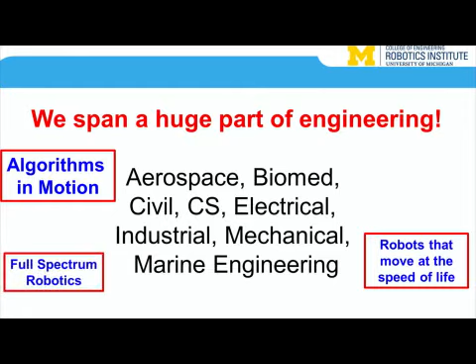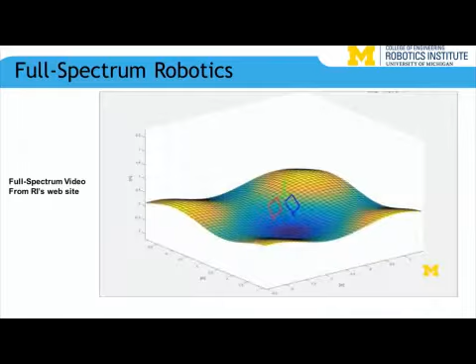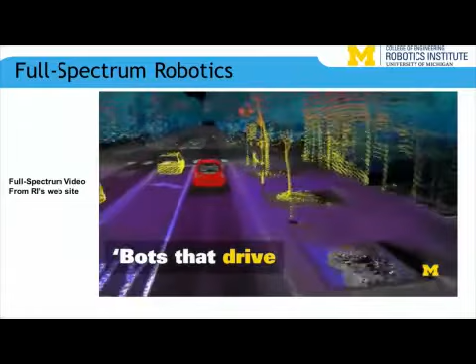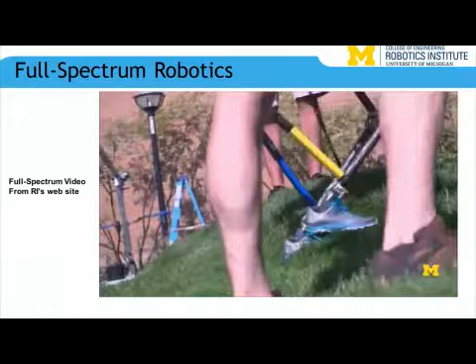So this is a video that covers some of the activities, whether it's on land or underwater or in the air, or building hardware to be super efficient, algorithms to make machines autonomous and work around people. Yes, we do work with M-City. We have great activities for students learning. Impossible robots doing absolutely wondrous things. And we'll talk about our work in rehab robotics as well. Now, the only thing we're missing is a couple of students like this last guy from the Discovery Channel, who is just completely covered from head to toe in tattoos.

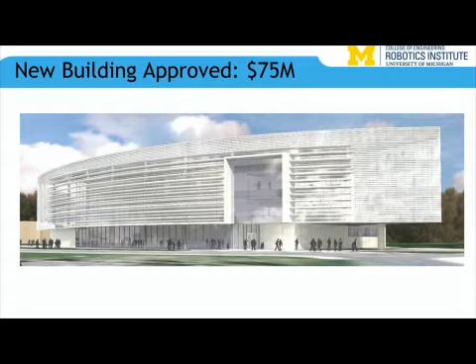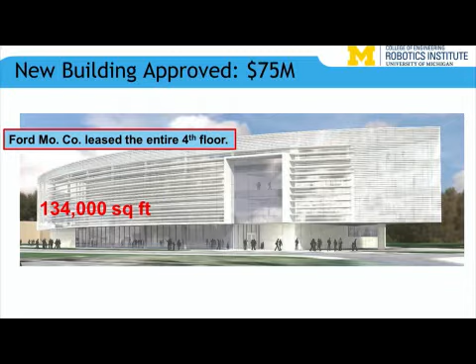So if you want to have total diversity at Michigan, we need a few more wild people to show up, okay? We've got a really nice building coming online. It will be up in about 2.5 years. Ford Motor Company has leased the entire 4th floor. They will have a large number of engineers on site working with us in robotics, definitely, working more broadly in the automotive sector, but also in material science. About 130,000 square feet of space, and there's plenty of state-of-the-art labs, classrooms, etc.

So let me just give you an idea about this building. I would like to be able to show you pictures, but they are all embargoed until they get through the regents. So next year.

So we'll have offices for about roughly 30 faculty. I think there's about 15 of us ready to move in now, so we still have quite a bit of hiring to do, and a large number of graduate students. It's going to be a beautiful space for undergraduate student teams, with state-of-the-art shop facilities to work in. Of course, what would Michigan Robotics be without some tie to the automotive sector?

We need more classrooms on North Campus. We'll have lots and lots of places where you cannot go from an office and exit the building without going through what I'm calling our Italian piazza. If you want to go to a lab, you want to go to an office, you'll have to go through our collaboration space, and this is where the ideas will happen, through random, unplanned encounters.

We are insisting on food. All the engineers going to North Campus are going, yeah, we don't want to walk over to Commons for everything. And then there's going to be gorgeous, gorgeous lab space. For all of you teachers here, the labs are designed to have glass walls, so this building is tourable. We want you all to come by, and it will take almost no planning for us to say yes, come on over. So teachers, definitely keep us in mind.

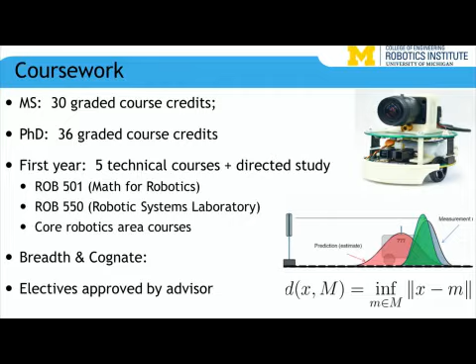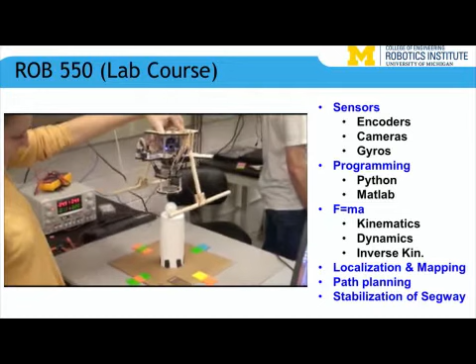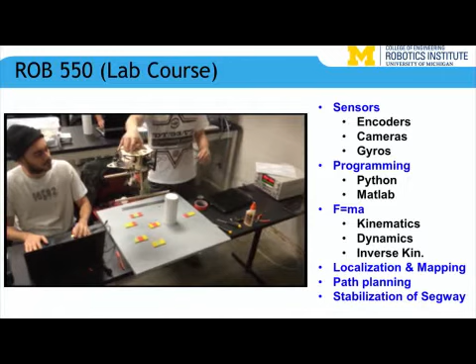So this is the robotics boot camp. The students come in their first semester, taking a math course I'll tell you about, and a hardware-centric course. In the hardware course, they're getting lots of skills in sensors, whether it's encoders, gyros, cameras, doing real-time path planning of robot manipulators in the face of obstacles.

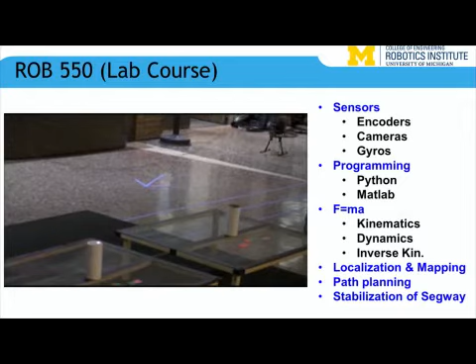They're programming everything up in Python mostly. If it were me, it would be much more MATLAB and real-time Simulink, but hey, I'm a control guy, so I'm a little software shy.

They're forced to dig into, even if you have a background in CS, enough physics that you can understand inverse kinematics, grasping, dropping of objects. You understand that gravity goes downward, and that's hard. It's the hardest thing about drones, isn't it, Tom Brady?

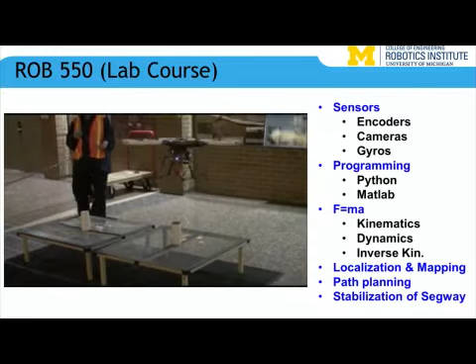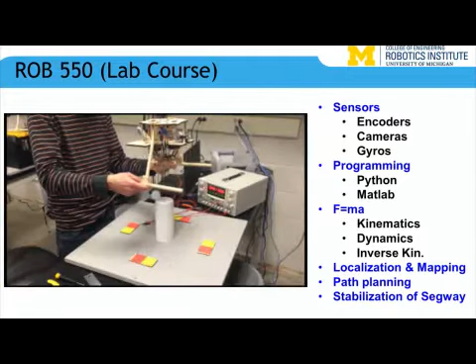They're doing localization and mapping, a very simple version of SLAM in this first course. The students have nicknamed it Robotics Boot Camp. It takes them on average about 35 to 40 hours a week for this course.

Another course they're taking at the same time is by one of our favorite professors, who will go unnamed. Just kidding, it's me.

So the students are being dragged through proof techniques. How do you do proof by contradiction, which sounds like a contradiction in terms? Enough linear algebra to be armed and dangerous. Then we take them through abstract inner product spaces, minimum distance problems, best approximation problems. They get the projection theorem and normal equations all worked out. They're doing recursive least squares, best linear unbiased estimation, minimum variance estimation. They're getting some practical stuff in matrices, singular value decompositions, QR factorizations, etc.

Once they've done all of that, the Kalman filter is sort of like falling off a log. They've seen all of the recursive forms of the equations. And then we're not done there. We'll do enough real analysis that they understand open sets and closed sets from very fundamental principles, compactness, Cauchy sequences, fixed point theorems, etc. And then we end up with a user's tour of quadratic programs and linear programs.

Now you would think with all of that, the course would have a terrible, terrible reputation. So the enrollment started out with 29 students the first year, because the room only would seat 30.

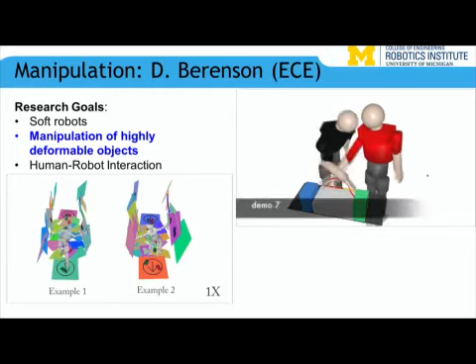So here's just one example of our most recent hire, Dmitry Berenson, who started with us in January of this year. You see the two humans on the right. They're able to reach around each other, plan for and make guesses about what the other human is going to do, and to work in a very cooperative manner. So what he is doing is trying to develop the algorithms so that robots can anticipate what you are doing, so that you can work side by side with them.

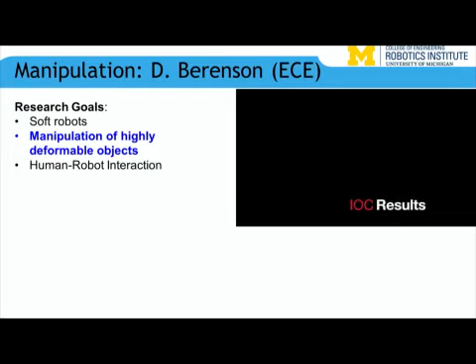And then you give them all of the hard stuff, and you get to have lunch, okay, while they just sit there and charge their batteries. So that's the idea. Yeah, we do need to work on another class on just treating robots with more respect and giving them a lunch break as well, but we haven't gotten that far yet.

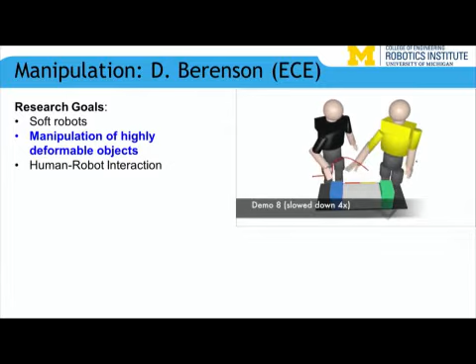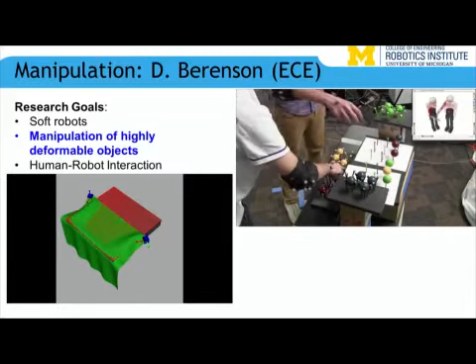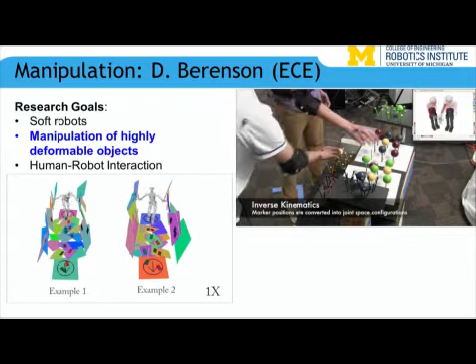So when it comes down to doing something fundamental, manipulation is not the stuff that you see in a standard factory floor today. It's really mobile robots picking up objects in very complicated environments, or like this first video that was playing here. Dimitri's also working on objects that are very soft. Manipulating a solid object where you know the shape, that's fairly straightforward, but taking something like a sheet and spreading it out is a totally different problem, and in terms of mathematics, it's an infinite dimensional problem.

One thing the new building will have, which is super exciting, is a 3-story fly lab. So once again, you will want to tour this building when it's open. It's going to be super exciting. We're going to be very strong in the drone area.

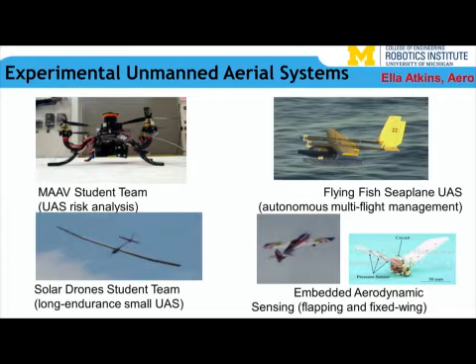Another thing that's going to happen, probably sometime in the fall, is that there will be a very large, roughly 2-story tent put up next to the Space Research Building so that we can fly drones outside, in the wind, in the snow, in the rain, etc. And I think there are plans to do some robot racing the week the tent opens. I wouldn't be surprised, okay?

Turning once again to rehabilitation robotics, we have many researchers working on leg robots of one form or another. One of the ways this work directly helps people—I don't mean the hypothetical scenario of sending a robot into a collapsed building to rescue you, which is another great way a leg robot can interact with people—I mean when you've suffered an injury to the body, whether neural, muscular, or joint related.

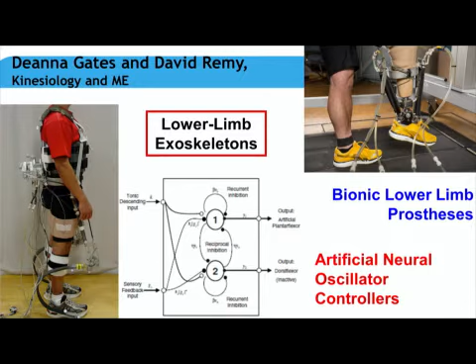We are developing devices that can be attached to your body to help you recover, either through rehabilitation or permanent application of an orthotic or exoskeleton. If you happen to be so unfortunate as to lose an upper or lower limb, we also have some very fundamental work going on.

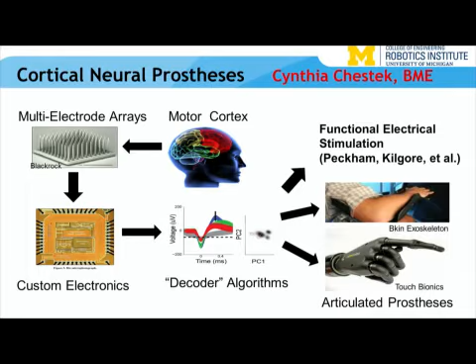Cynthia Chestek's lab has a very nice demo you can see later, trying to take advantage of existing neural connections in the body—the fact that you can still form images in your brain of what you want to accomplish—and get that information connected to, whether it's a hand or eventually legs.

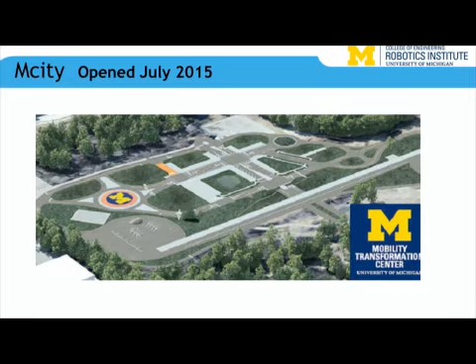Henry covered very nicely our connection between robotics and M-City. The thing to remember about M-City is that it's all hardware—there are no faculty really associated with M-City. About a quarter of the Robotics Institute consists of faculty working in autonomous vehicles, and they support what's going on at the Mobility Transformation Center, MTC, M-City, and the new center Henry is launching.

Part of that I'm very happy about is the open connected automated vehicles work. Huei Peng, who's the director of MTC, is teaming up with his managing director, Carrie Morton, and a brilliant young faculty member in electrical engineering, Necmiye Ozay, to get the car set up so that case studies can be done easily.

We want people who aren't experts in the entire ecosystem of autonomy to be able to work on their specific areas of expertise—whether that's 3D processing, 3D point clouds, or in the case of Necmiye, on the right here, she's an expert in correct-by-construction control design.

This means developing software that meets a specification, so you have a priori guarantees on the behavior of the closed loop system. She's working with Huei to make sure her types of algorithms can be implemented easily in this car, and she is the first beta user.

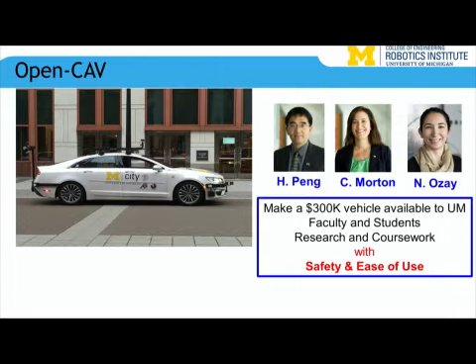I'll take a few last minutes to share some exciting work from my lab since my students have been here—they've been very patient while I try to learn how to be a director. I pretty much ignored them in the fall term, and they still kept the lab going.

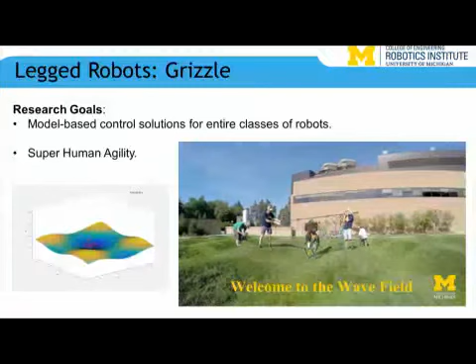One of the things we've been trying to do is get robots outdoors as much as possible. We do work in the lab, but usually just to make sure the hardware is working and tune up a few things on the algorithm—then we do most of our testing outdoors.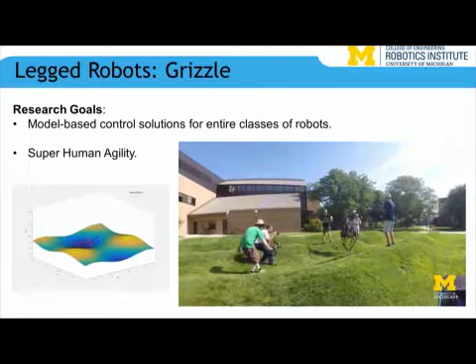This is the Wave Field, just outdoors of the Aerospace building. It's got a very challenging, undulating surface, and this robot is navigating it blindfolded.

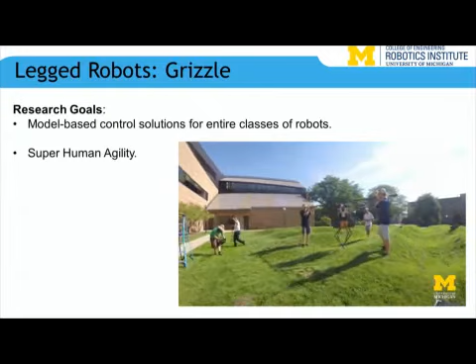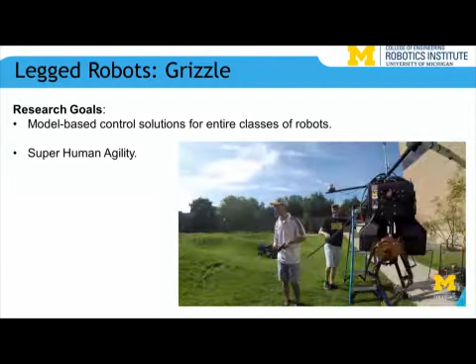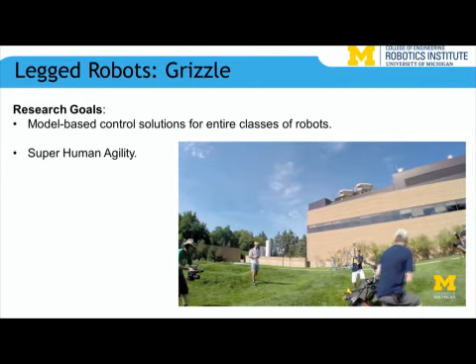Blindfolded—why would you make a robot walk blindfolded? Just search GoPro fireman on YouTube, and you'll find videos of firemen in houses where, as soon as you get smoke and dust, all your camera data goes to pot. So you need to make sure your robots are fully robust and can handle a lot of uncertainty in the visual data coming to them.

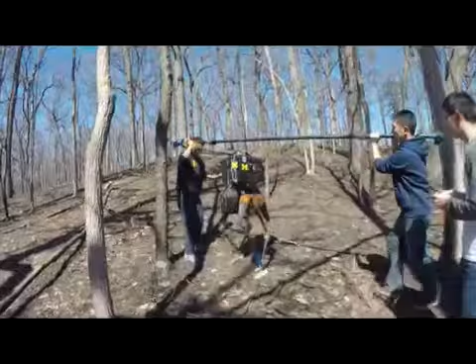So that's part of what we're working on. This is from just last Saturday—we're out north of the Mechanical Engineering building. The university had done a controlled burn to get things ready for prairie grass, reduce fire hazards, and so on.

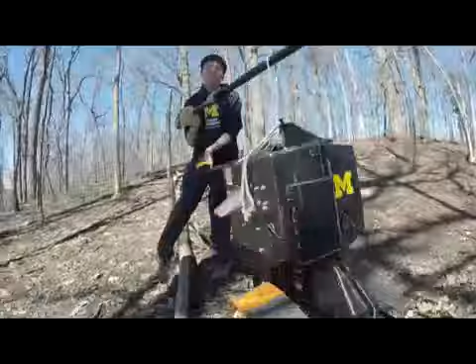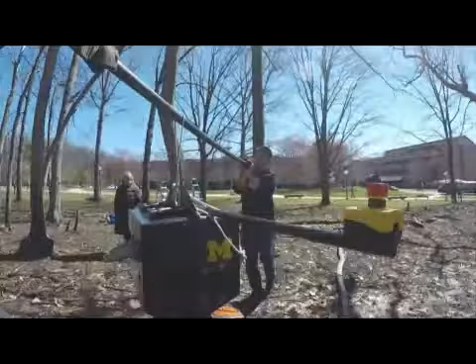The terrain looks pretty simple for a human when your eyes are open, but you'll see it's even challenging for humans. Human number one down. One more human standing... human still standing, human has eyes in the back of his head... human number two down. The robot's doing just as well as the humans here, but the robot needs to do better.

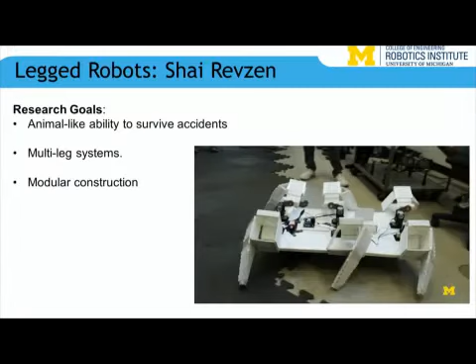I'll skip this—whoops, that's Shai Revzen's work. I didn't want to cut that out though.

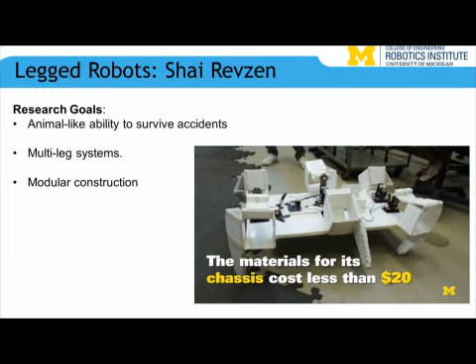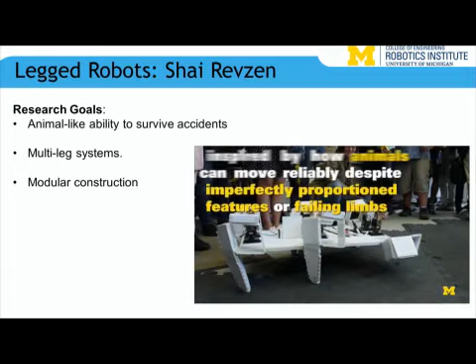We have other people doing legs in a totally different way—these are modular robots. Imagine you could show up with a backpack and just assemble a robot on site to meet any particular demand you have. That's what Shai's group is trying to do—they make these things out of really inexpensive hardware and try to make algorithms that are super robust.